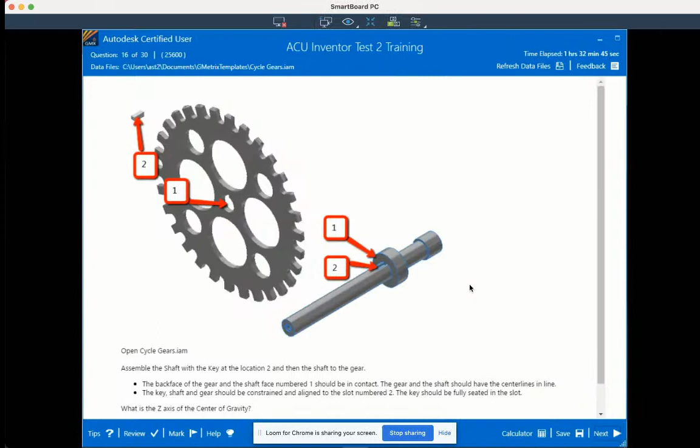This video we're going to be looking at item number 16, the open Cycle Gears assembly file. On this one, you have to do it in the correct order or it will be wrong, so pay attention. We're going to assemble the shaft with the key at location 2, then the shaft to the gear. So we'll put the key into the shaft first, then put the shaft into the gear. You also must pay attention to the order this stuff is done - the back face of the gear and shaft.

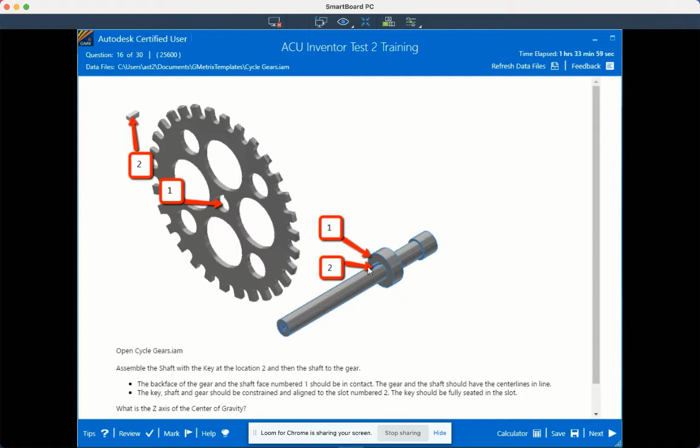Face numbered 1 - this part of the shaft has to be inserted into the back of this gear. Not this, which is the front; the back would be this back corner. The gear and shaft should have center lines in line. The key, the shaft, and the gear should be constrained and aligned to slot number 2. So you've got to fix the gear to the key once you get it on the shaft. Pay attention and let's go through this.

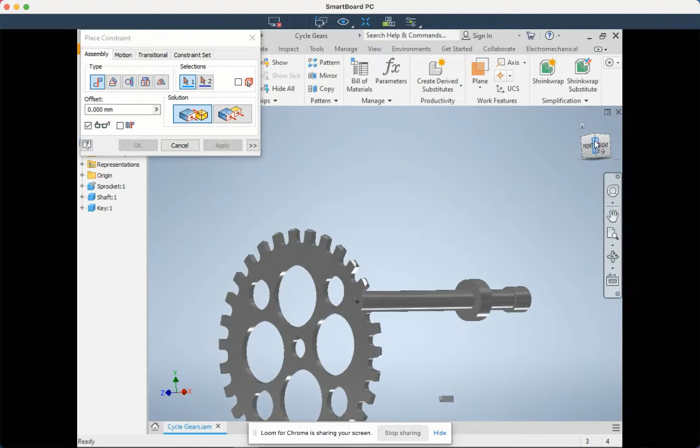The first thing we're going to do is put the key on the shaft, using the mate constraint. We'll zoom in and do the bottom of the key to the top face of the shaft. We just have to play with it to get where we can see what we want. Bottom of the key, and then we want to go to the top of the shaft - so right there, it clicks into place.

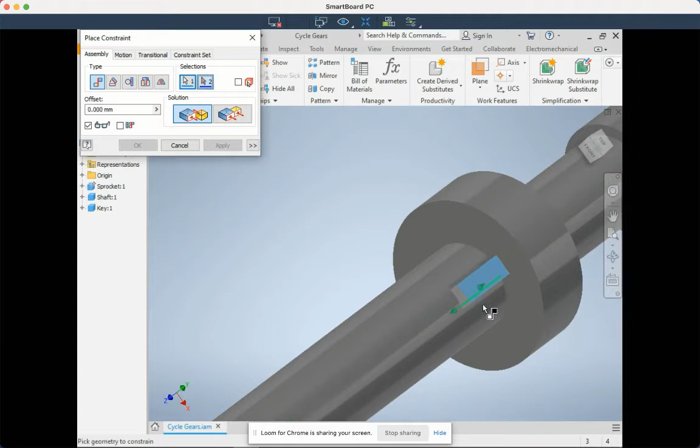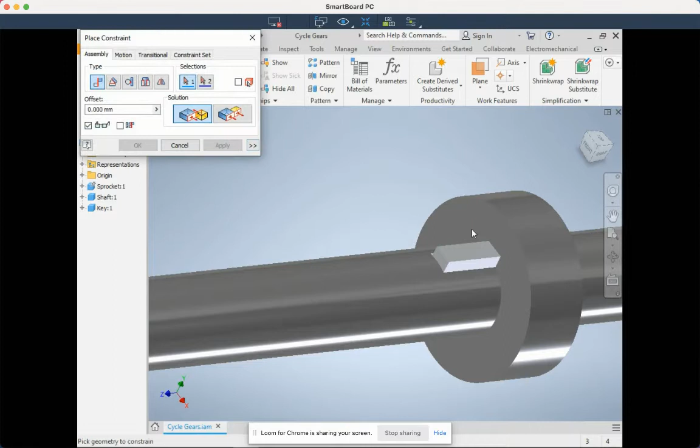We're going to tie down the x-axis next, which is running this way, again using the mate constraint. Didn't like what I did there - oh I see, so we're going to drag it over to get it out of the way. Then we're going to mate this side to this side - notice the arrows, they're going to lock together. So we've tied down 2 of the degrees of freedom.

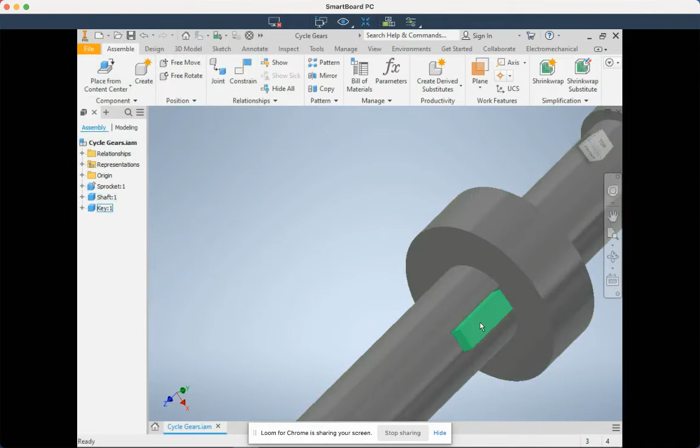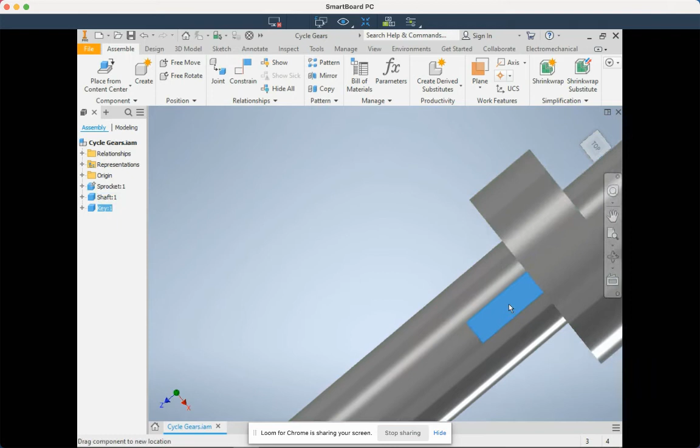So now we need to tie down - let's see, it still moves this way. So now we need to add a mate constraint here and to the back of the key again - constrain here to the back of the key. Now let's try to move the key - now the whole thing moves together. This part is fixed.

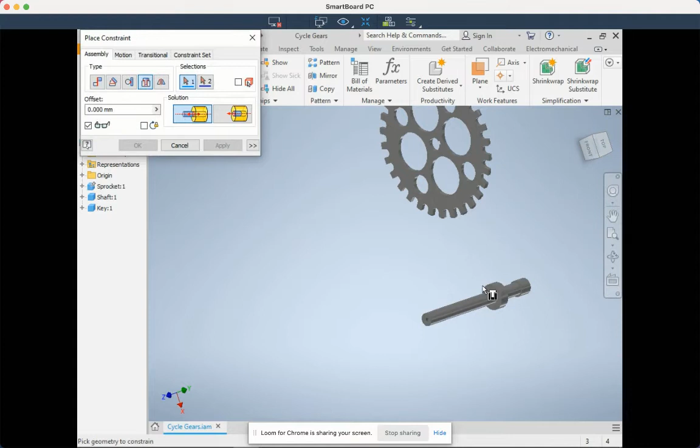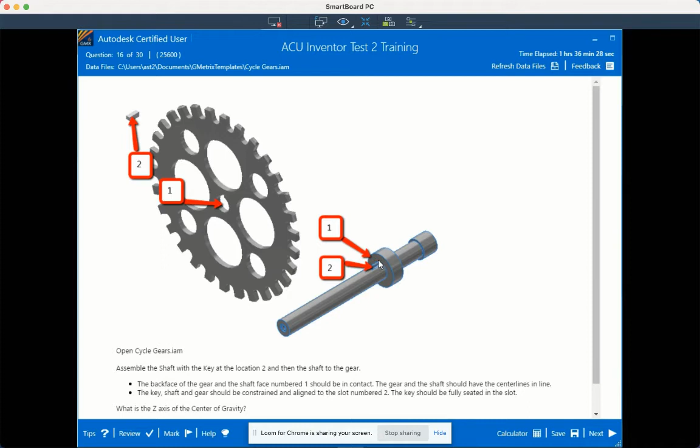Next, we're going to put the gear on here. Let's fix our orientation a little bit, and we're going to use constraint insert. Let's go back and check our problem - it wants the back face of the gear and the shaft face number 1 to be in contact. So this needs to go in with the back of the gear - this right here - so we're going to insert this.

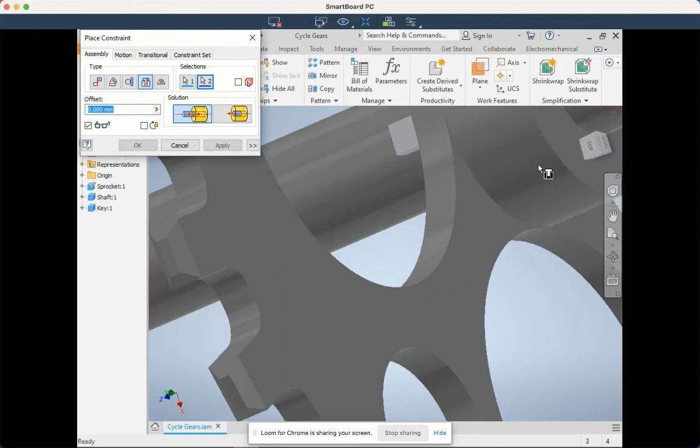That's the front. We're going to do the center - like that, it goes on there. So now we need to constrain the key to the gear. I'm just working on my placement where I'm at. Alright, so that looks good.

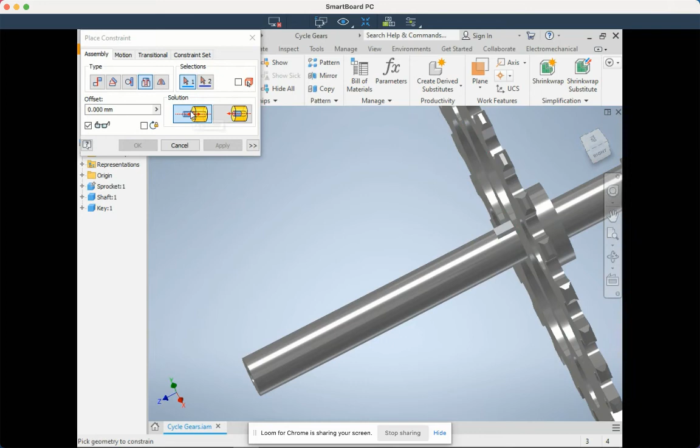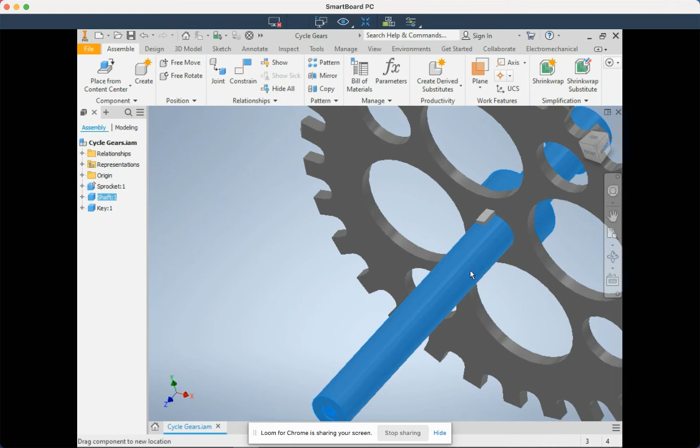So now we're going to change back to the mate constraint after we rotate this around. We need to find the spot on the shaft where there's a gap on the gear - and it's right there. Let's rotate this on around a little bit - there we go. So now let's mate the inside of this to the inside of this - they click together, and that is a wrap.

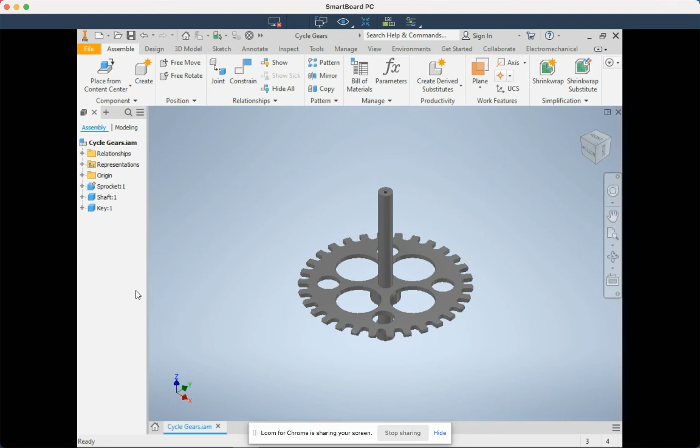At this point, you go and get the z-axis for the center of gravity. So iProperties, physical, and then you just click update, and it wants the z-axis - so the value here once you update it. Alright, that should be it, guys.